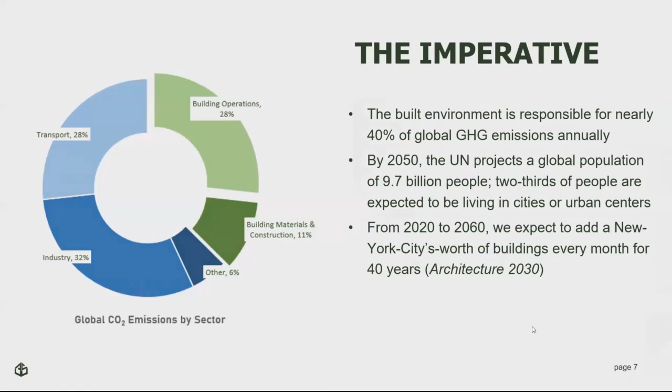Acknowledging the need to make huge changes and change course to avoid the worst climate projections, the US has set goals to reduce emissions by 50% below the 2005 baseline by 2030, reach net zero emissions by 2050, and scale up CO2 removal strategies.

Knowing the challenge we face and the amount of emissions the building sector is currently contributing to the problem, and the goals that the US has to address this problem, it's clear that the building sector needs a low carbon, right now solution.

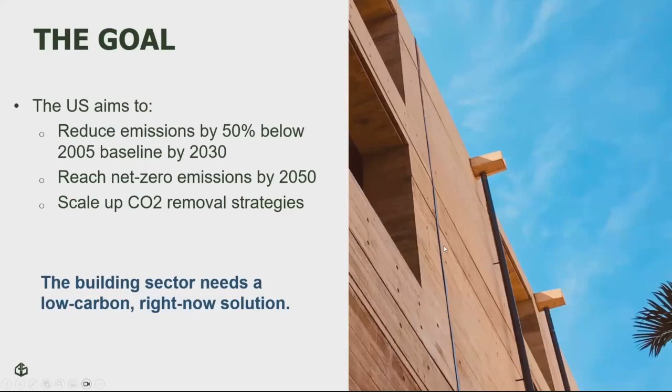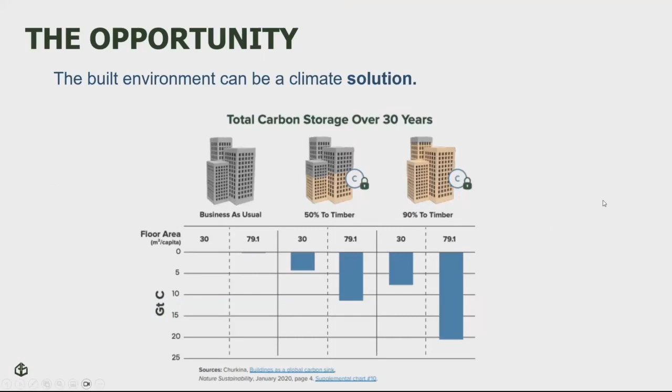The good news is that we have one, and by building more buildings with wood, the built environment could actually be a climate solution instead of a problem.

So before I get too far into the details, I want to clarify a few terms and definitions for anyone who is unfamiliar. Carbon sequestration and carbon storage are terms often used interchangeably, but they're actually not quite the same thing. When we talk about carbon sequestration, we're referring to the actual process of capturing CO2 and converting it, in the case of a tree, into carbon fiber through photosynthesis.

Carbon storage is referring to the amount of carbon contained or stored in a tree or wood product for its lifetime. In other words, sequestration is the active process of taking CO2 out of the air, and storage is the keeping of that carbon in a substance for some amount of time.

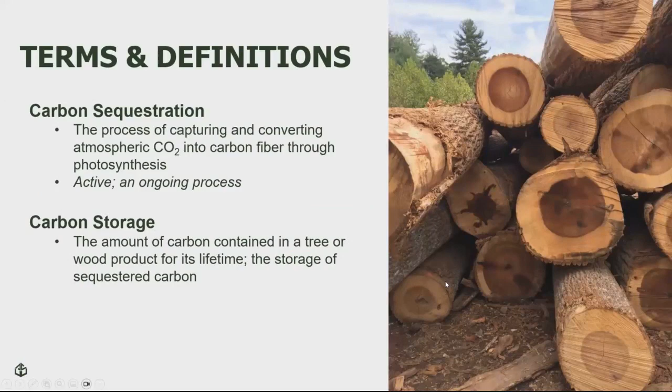I also wanted to clarify another term that comes up a lot in carbon or greenhouse gas accounting, but is sometimes not very well understood. Biogenic carbon, in simple terms, is non-fossil carbon, or carbon found in biological or living materials.

For us in the wood products industry, when we talk about biogenic carbon, we're referring to the carbon sequestered by a tree as it grows that continues to be stored in a wood product for its lifetime. This is what we mean when we say wood stores carbon or emits it at the end of its life.

In a life cycle assessment, per the standard ISO 21930, biogenic carbon entering a product system can be characterized with a factor of -1 if the wood originated from sustainably managed forests. And then at the end of the product's life, that carbon that was stored must be represented with a factor of +1. I say all of this just to clarify what kind of carbon we're talking about when we say wood stores carbon.

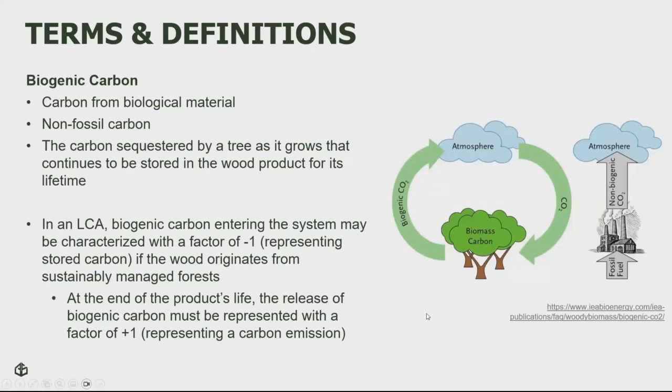Another term I wanted to touch on up front is embodied carbon. When we talk about buildings, embodied carbon is the emissions associated with the materials used in the building. This includes the emissions associated with extraction of the raw materials used to manufacture a building material, the emissions that come from the manufacturing process, and the transport of these materials. This is distinct from operational carbon, which is often a big focus in discussions about built environment emissions and should be, but that has to do with building energy consumption and emissions during the use phase of a building, not the materials themselves used to build the building.

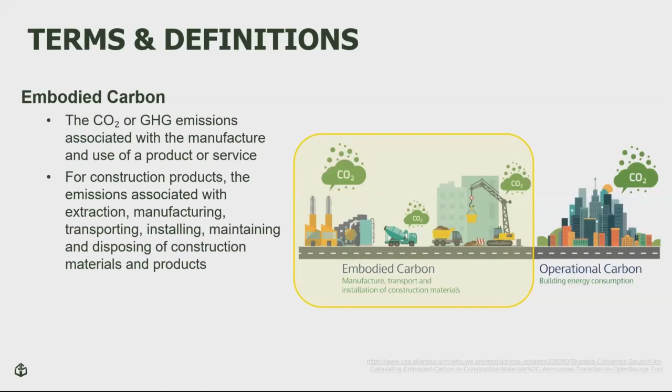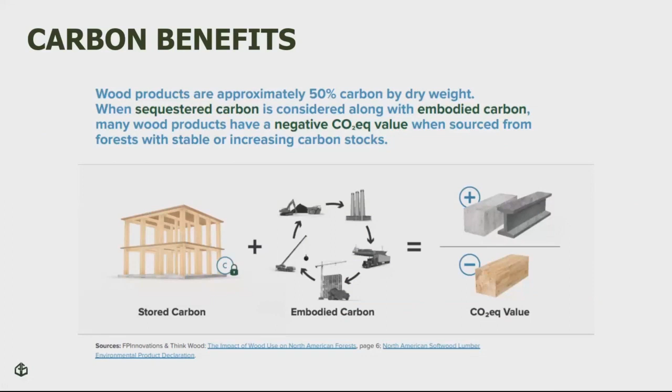Now that we've defined some essential terms, let's go back to wood products and the benefits they provide. Wood is approximately 50% carbon by dry weight. As I mentioned in the previous slide, this comes from CO2 sequestered from the atmosphere that is stored as carbon in wood fiber. Wood is a naturally grown building material that not only stores carbon, but also has lower embodied carbon from extraction and manufacturing emissions than other conventional building materials. So considering these benefits together, this low embodied carbon and the stored carbon, wood products often have a net negative CO2 value.

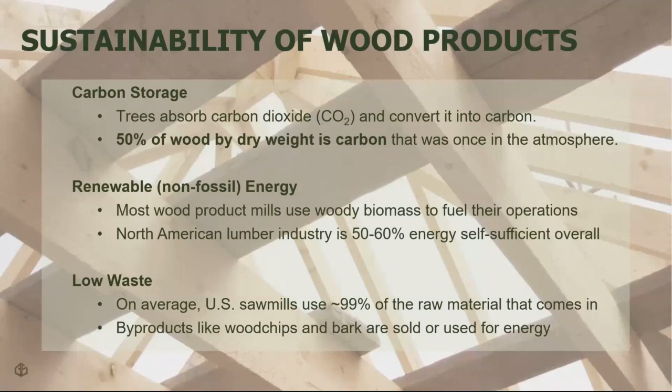So as I just mentioned, wood stores carbon, and that is one of the huge environmental benefits of wood products. But wood is also sustainable in other ways. It uses mostly renewable energy in its manufacturing process, because most wood product mills use woody biomass to fuel their operations. For example, the North American lumber industry is over 50% energy self-sufficient, meaning it uses its own wood residues or byproducts to fuel its operations. And another facet of the inherent sustainability of wood products, which is kind of tied to the second point, is their low waste. On average, US sawmills use 99% of the logs that come into the facility. Byproducts like chips or bark are used for energy generation at the mill or sold to the market, so very little is wasted.

Harvests are actually a very small portion of US forest land. In the US, forest stocks have been stable or increasing since the early 1900s. And currently only 2% of working forests in the US are actually harvested each year, all of which is replanted. So the takeaway about US forestry and US wood products is that they are not causing deforestation.

As a quick aside, I used to be one of those people with the mentality that caring about the environment meant being a tree hugger and hating the thought of cutting down a tree. I remember driving through rural Pennsylvania as a kid and seeing a truck full of logs and just feeling so sad at the thought of trees being cut down. But when I started to learn about the ways that using wood products and actively managing forests in a sustainable way actually benefits our forests and our climate, and when I started to meet the people who have been harvesting and replanting trees and manufacturing wood products for generations, it became pretty hard for me to see wood products as this harmful, evil thing. And we have data to back this up.

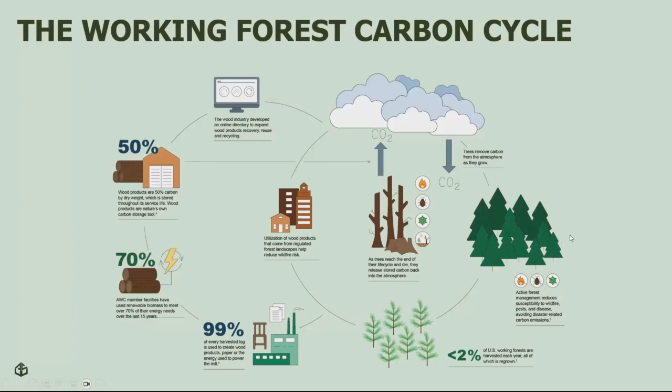So a few more terms before we get into that data. Life cycle assessment, or LCA, is the compilation and evaluation of the inputs, outputs, and potential environmental impacts of a product throughout its life cycle. In other words, it's quantifying everything that goes into and comes out of a product system and analyzing its impacts on the environment, such as greenhouse gas emissions, energy use, and waste.

Life cycle inventory is a key step in an LCA, and it's the phase that involves creating an inventory of input and output flows for the system. In other words, LCI is the data collection component of an LCA.

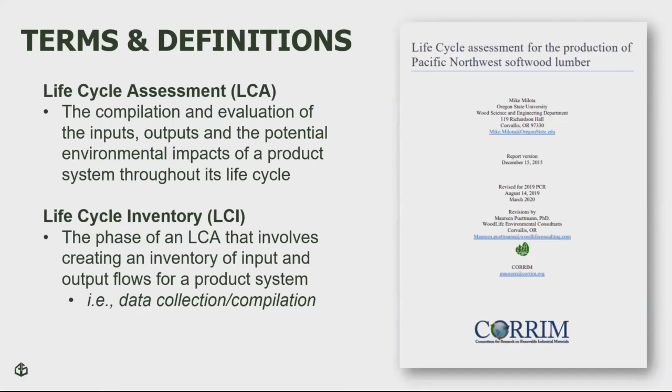ISO, or the International Organization for Standardization, is the organization that basically sets the rules for LCA. ISO standards are internationally developed and agreed upon by experts from around the world, and standards cover a wide range of activities, from making a product, managing a process, delivering a service, or supplying materials. ISO describes standards kind of like a formula that describes the best way of doing something.

Another important term is PCR, or product category rules. These are the requirements for a specific type of product, for instance structural wood products, that govern what must be included in an LCA and reported in an environmental product declaration. PCRs also must follow the ISO standards described in the previous slide.

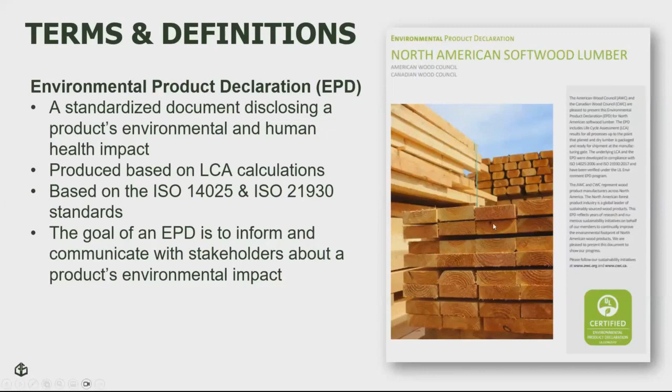According to ISO 21930, the standard that governs EPDs for construction products, the life cycle stages that must be included in an EPD are stages A1 through A3. A1 is the raw material extraction. A2 is the transport of those raw materials to the manufacturing facility. A3 is the actual manufacture at the facility of construction materials. The LCA community, or those familiar with EPDs, often refer to these three stages together as cradle to gate.

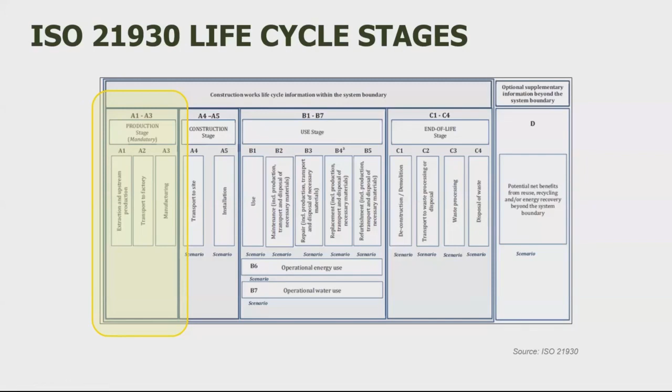For wood products, A1 means forestry, which includes logging operations, site preparation, and forest management, as well as all the equipment and processes that go into harvesting the trees. A2 is the transport of the logs and other materials to the manufacturing site or the mill. A3 includes everything that goes on at the mill, including debarking and cutting of a log, drying it to the necessary moisture content, planing, sanding, assembling, and packaging it.

The complete life cycle of a wood product includes everything from forest management through production and use to final disposal, which would be called cradle to grave. However, since the use and disposal phases can vary a lot depending on a range of factors, A1 through A3 are the stages that are required and included in EPDs. This is the same for other building materials—other building material EPDs are also usually cradle to gate in scope.

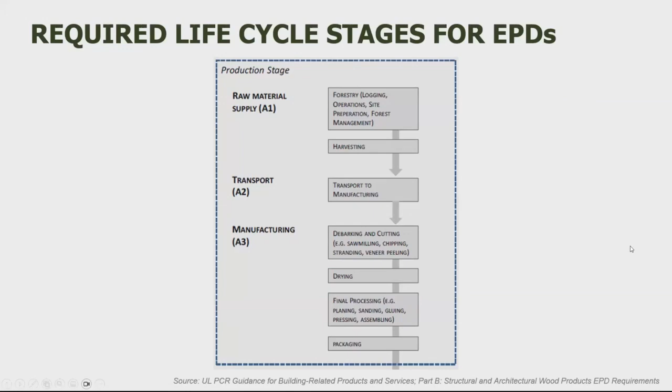EPDs are becoming increasingly widespread in policies and in the market as companies and consumers seek to better understand their environmental impacts and collectively make lower carbon purchasing decisions. The wood product sector is doing our part to participate in this movement toward greater transparency about environmental impacts, and we actually see this as an opportunity because we believe US wood products have a really good story to tell. So how is AWC using LCA and EPDs to tell that sustainability story?

First I'll tell you about the AWC Lifecycle Survey. AWC has developed an online data collection platform that gathers mill-level LCI data from our member companies. The manufacturing data collected in the survey is then used in LCAs and summarized in EPDs. Our vision for the survey is that it becomes a central point for the entire industry's environmental data, which will allow for more efficient and robust analysis and reporting moving forward.

The data collected in our survey and the resulting EPDs is extremely valuable for providing trends, benchmarking for improvements, assessing our impacts and influencing policies, and ultimately telling the great sustainability story of U.S. wood products.

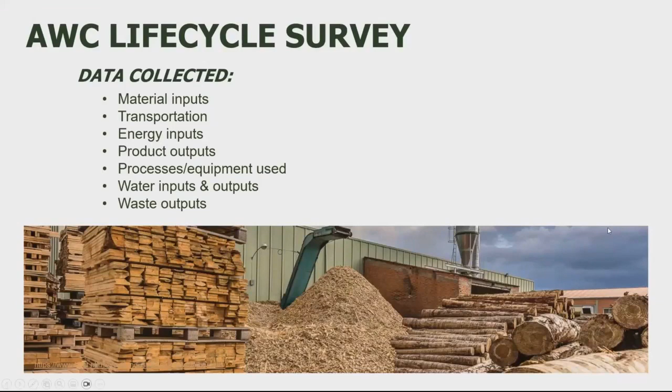Users must also report what they do with their byproducts made at the mill, whether they are sold externally or used internally for energy generation or some other purpose. The aim of this survey is to track all the material and energy flows in the manufacturing process so that we can use really robust data for life cycle assessments.

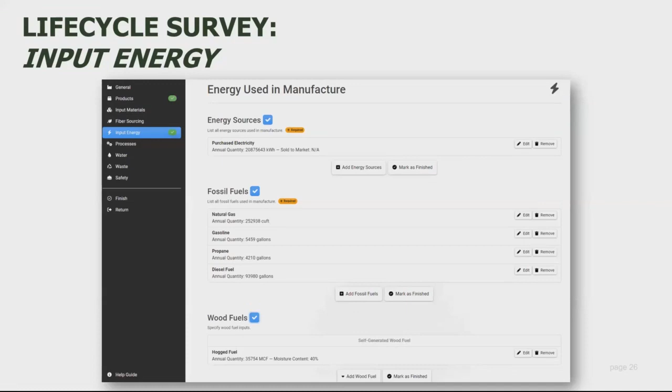Here's the energy tab of the survey, where mills must also report all their energy use, including electricity and any fossil fuels used in manufacturing processes, such as gasoline to power transport equipment. As I mentioned earlier, many manufacturers get a large portion of their energy from biomass, so here they must also report any wood fuels used and whether they were self-generated, coming from their own byproducts made in the mill, or purchased from another source.

Some wood products have more complex manufacturing processes and may require many more inputs like resins and wax and other materials, so those would also be reported on this page. Mills must also report any packaging that goes on their final products.

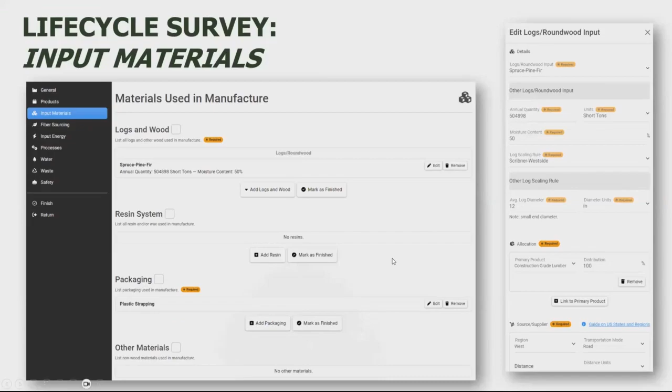Once we've gotten all that information and mills have submitted their surveys detailing annual manufacturing data, it's time to actually do the life cycle assessment of the data. After doing a thorough QA/QC, which often involves following up with mills and correcting any missing or incorrect numbers, the survey database generates production-weighted averages for all of the data fields.

AWC partners with the Consortium on Research for Renewable Industrial Materials, or CORRIM. CORRIM is a group of researchers from over a dozen organizations with decades of experience in wood product LCAs. Through an MOU with AWC, CORRIM will use the aggregated data from the survey to conduct life cycle assessments that will ultimately be summarized and published as EPDs.

This past spring, AWC completed data collection for the 2021 manufacturing year, and our survey is currently open and collecting data for the 2022 manufacturing year. Moving forward, data collection will always fall on this cycle of August through December.

With the first round of data we collected for the 2021 manufacturing year, we'll be publishing the updated regional EPDs for softwood lumber, and those should be published by mid-2024. Other wood products are in process and will also be updated with data from the survey.

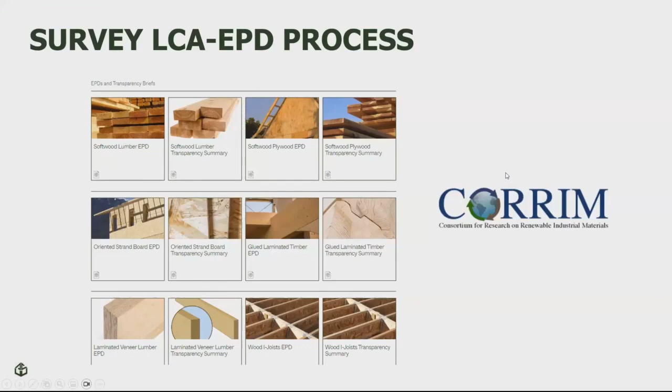Another project concurrent with the life cycle survey work we're doing is AWC's wood sourcing tool, which is focused on the supply chain and upstream sourcing of wood fiber. The standard ASTM D7612 sets forth the criteria for using different systems and certifications to ensure sustainability in wood supply.

The different types of sustainability assurances fit into 3 categories: non-controversial, responsible, and certified. Non-controversial means the wood comes from a legal source of forest products. In the US, where there's a strong rule of law around forestry with laws that protect water quality and endangered species, this category alone is already ensuring that wood comes from good practices and is not coming from deforestation or illegal logging.

Responsible, the next category, means wood fiber is acquired according to an independently certified responsible procurement system, or is harvested from regions with regulatory systems in place to implement forestry best management practices. This is a really strong assurance that wood is sourced using practices that protect forests and protect the air and water that flows through and around them. Through a certified procurement system for responsible sourcing, the mills have a system in place to document and ensure that their logs are coming from forests that comply with these forestry best management practices.

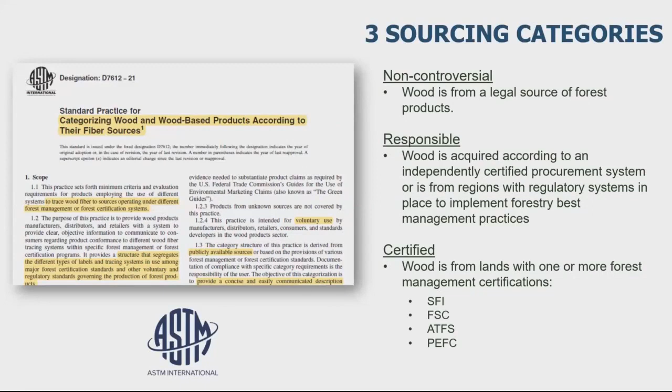So AWC's life cycle survey also collects mill-level data on these 3 categories of fiber sourcing assurances: non-controversial, responsible, and certified. So beyond the LCI data that I described, which is used for EPDs, a mill is also required to declare how much of their fiber comes from each of these 3 sourcing categories.

And then the fiber sourcing data that we collect in the survey is anonymized and averaged for each region of the US. And these numbers then feed into a separate tool AWC has developed called the wood sourcing tool. This tool answers the question, how can I tell if wood is sustainably sourced? It presents regional fiber sourcing data as well as numerous forestry facts and answers to several frequently asked questions about forestry and sustainability.

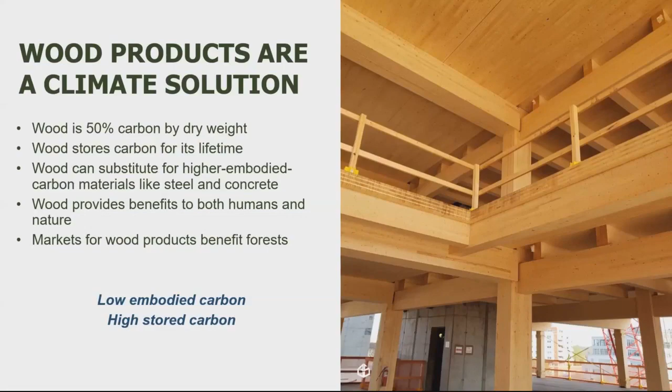I wanted to end this presentation with another quote from the IPCC, the United Nations body for assessing the science related to climate change. The IPCC acknowledges the important role forests and forest products play in the fight against climate change, saying in the long term, a sustainable forest management strategy aimed at maintaining or increasing forest carbon stocks while producing an annual sustained yield of timber, fiber, or energy from the forest will generate the largest sustained mitigation.

It's been a pleasure to talk to you about this important work we're doing to advance environmental transparency for wood products. And I'd love to answer any questions you may have.